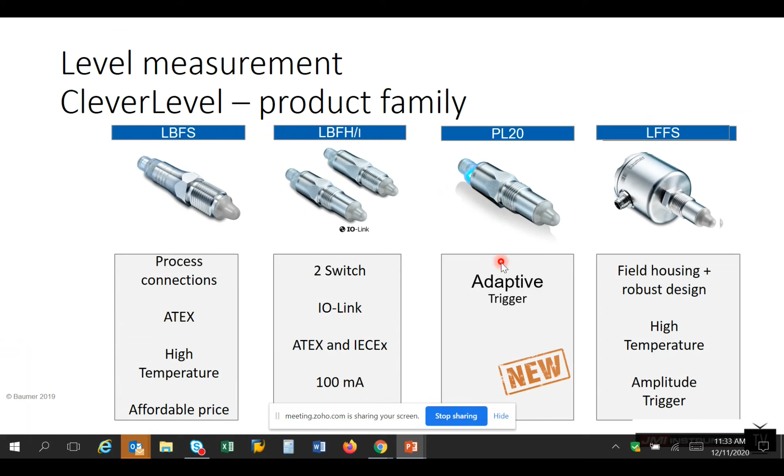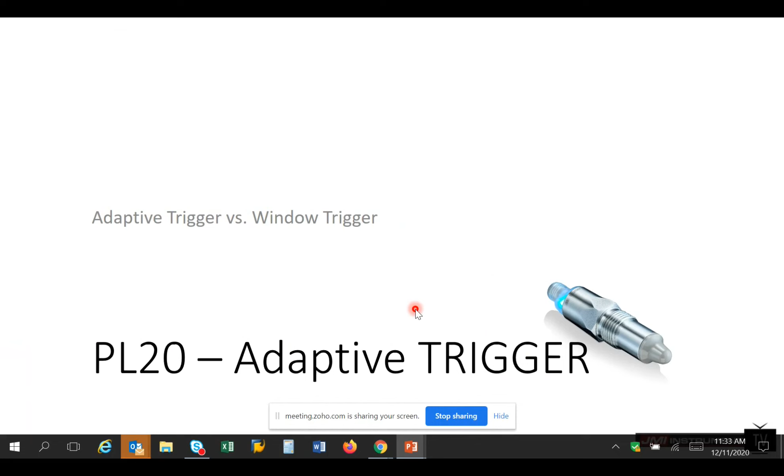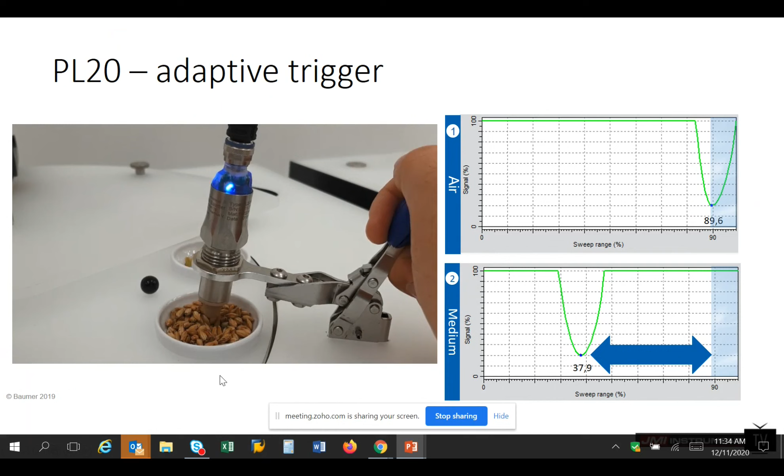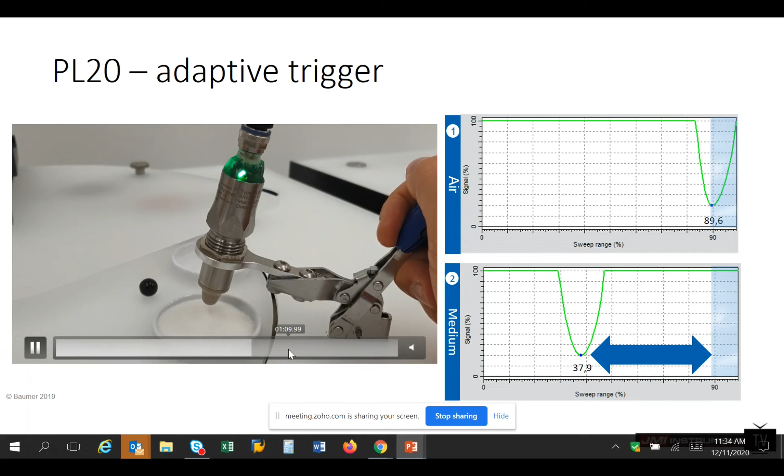So we're jumping through a little bit here, seeing different medias. This is rice of some form. Looks like maybe raw hops before it's been pelletized. Some granulars here. Again, we're going to see it switch from green to blue. Jump ahead to some liquids, some sticky medias.

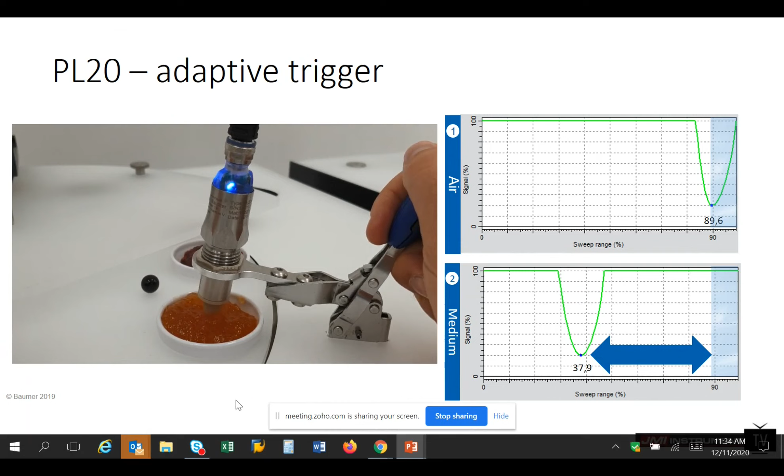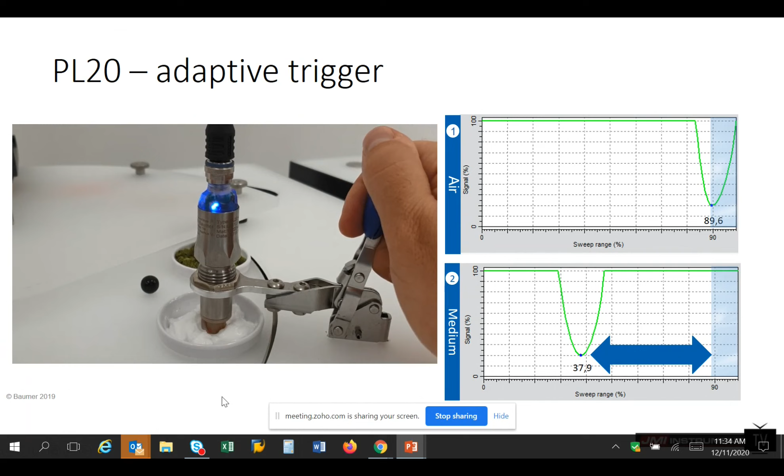So again, Kyle, this is all the same probe, and you can do it in all these different medias. I'm seeing liquid, different types of solids or jellies. Correct. And is that like sour cream right there? I believe it's hand cream, but yep, it's all just the factory settings, original, just right out of the box and hooked up. So we'll go over into the details of what makes this all work right now.

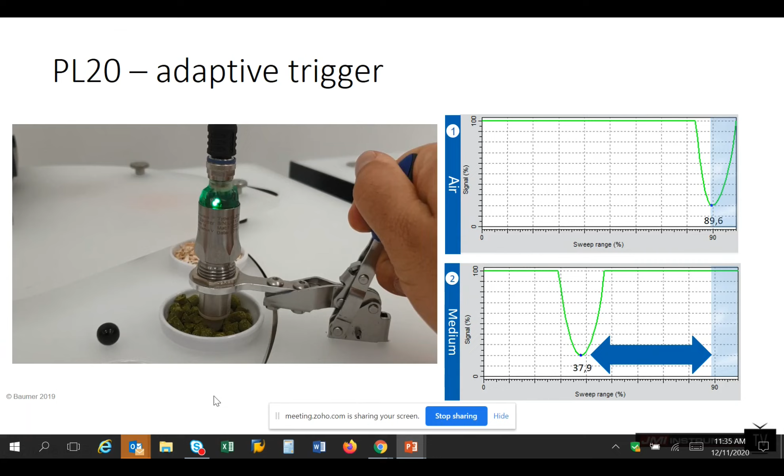So we keep saying adaptive trigger. What does it do? What does it offer to you as a customer? It's going to give you level detection without any configuration. Currently, when you put a tuning fork in, it will just turn on and off, no questions asked. If you looked at some of the other technologies similar to ours, you have to choose a media range ahead of time. Is it going to be dry? Is it going to be wet? Is it going to be bulk powders, or is it going to be liquids? With this unit, we can just take it out of the box, hook it up to a power source, and we're pretty much ready to roll.

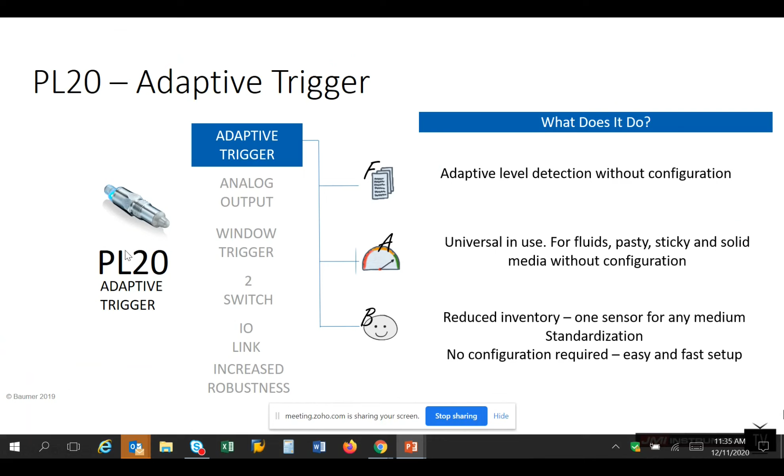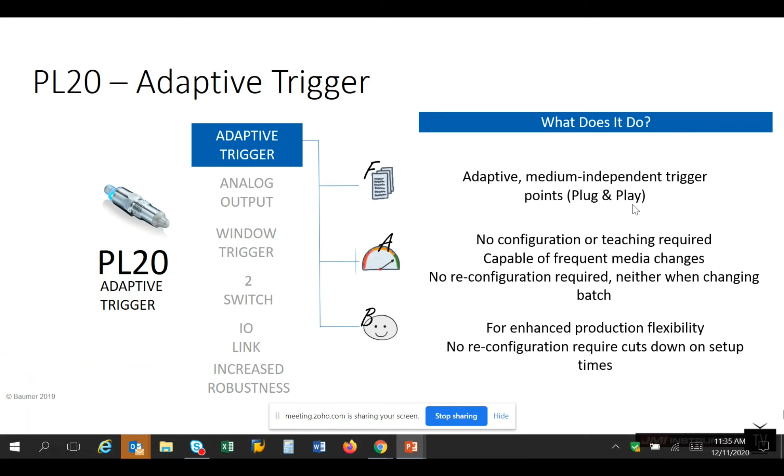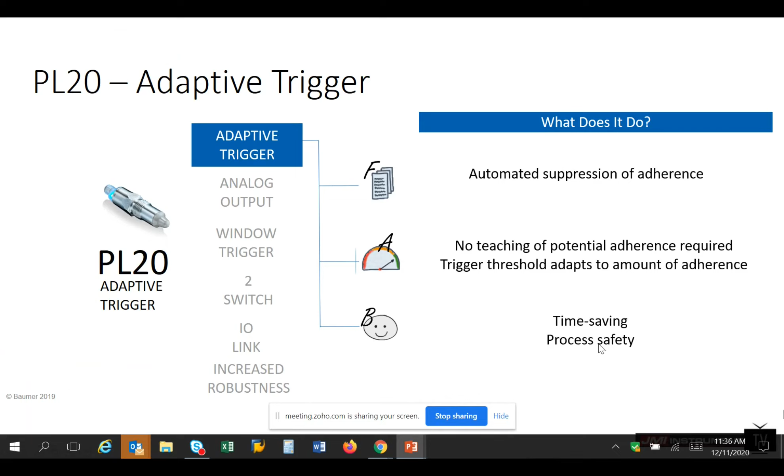Some of the other features, again, if we are changing through, there's no configuration needed. We can just go ahead and hook it up, and we're ready to roll. Lastly, if our product is going to build up on the tip of this probe, it's self-learning enough that it will tell that adherence, and it'll be able to work through that in its own fashion. So we don't have to worry about cleaning it as often. CIP will certainly clean it if it's in a pipe or in a tank. So it's just a time savings to get it up and running and get your process going.

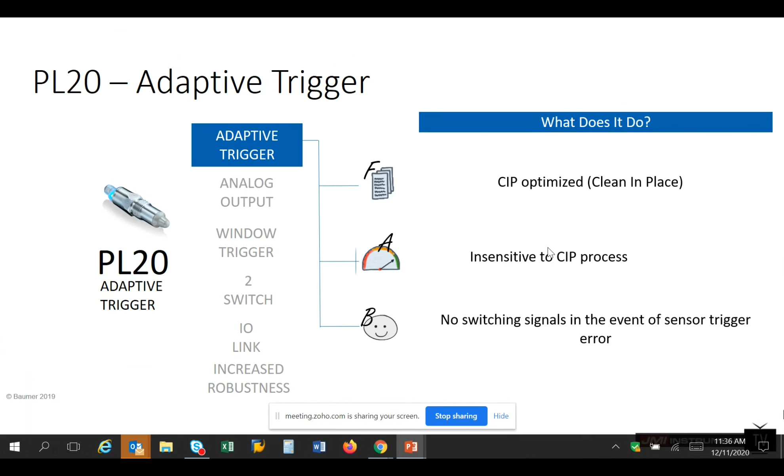Lastly, it'll tell you if it has buildup. Is that it? Yep, we can enable it to do that. What it will do is it'll work through the buildup as it happens in its natural state. So we don't even have to do anything with it. And then in the CIP process, if you have it for tank level, part of the problems with tuning forks and some of the others can be that splash on them or the cleaning spray ball will cause some issues to the other sensors. So we'll cover real quickly what we have that allows us to not have those issues.

So if you order a PL20 directly from the factory, or from JMI I should say, what you're going to get is a switch setup with the adaptive trigger. You're going to get dual switches. We're just looking at switch configuration 1 here, but it's a dual switch device, 24 volt DC, your choice of PNP, NPN, or digital push pull. Once you have it, you can configure it to normally open or normally closed.

If you wanted to. Factory direct, it comes normally open, disabled advanced settings. The set points, we went through as the factory and found that these are the most commonly used ways or setup for this switch. So again, it's very easy to just take it out of the box from JMI, get it hooked up, and you're off and running.

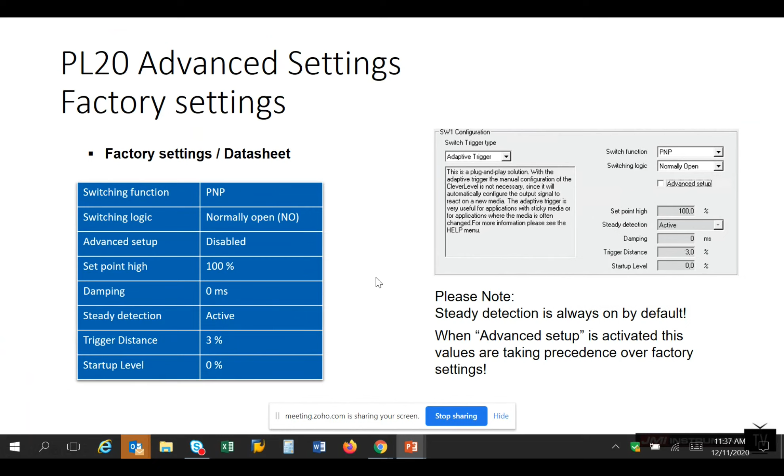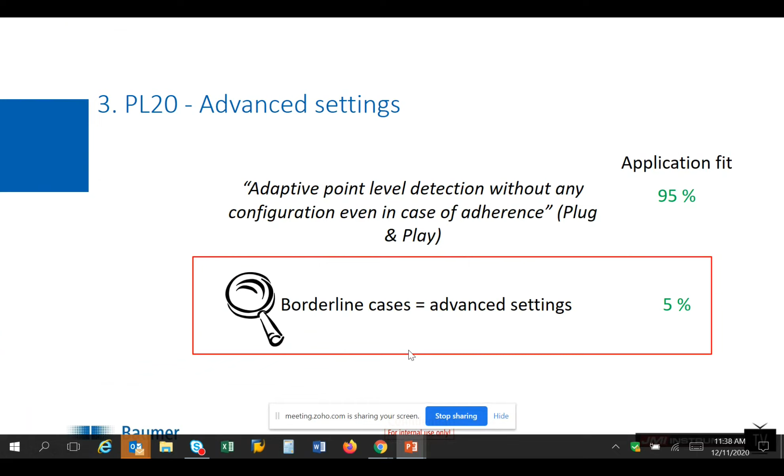If we are part of this 5% that is not going to be just a plug and play device, we do have options for some advanced settings. We're going to go over those now and kind of walk you through what they do and what they have to offer. Steady detection. This is one of the ones that separates us from, say, a tuning fork or the competitor's products, is this steady detection.

So when we are cleaning with a spray ball in a tank, we have the water coming out. It may run down the wall. It may spray directly on the switch. There's a lot of things that can happen. And the LBFH, our 3rd generation switch here, is similar to the competitors or a tuning fork, a little bit closer in the way it functions. So we're going to go ahead and watch this video and we'll see what happens with the LBFH here.

So this is the old Baumer CleverLevel, right? Correct. This is generation 3. Now, if we wanted to, we could go in and tune this and make it work in this situation. But right out of the box, it's going to trip for you and it's going to act like a tuning fork. So again, you can see we're having some issues there with it. We could tune those out, but as a whole, out of the box, it's going to not work right away.

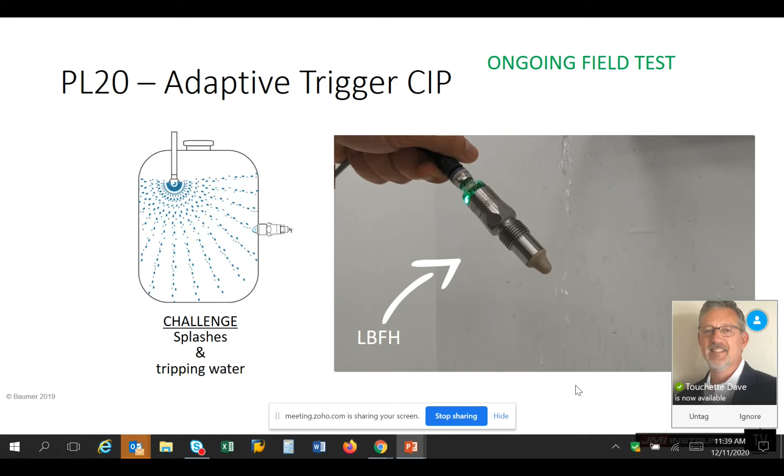With our new PL20. Wait, that's the last name. What was that? Dave Touchette. I didn't know if he was joining us or not, but he was available. Oh, anyways, sorry. I know you're fine.

So this is the new one, right? In a spray ball application, you don't want these to trip. Correct. Right? If you're not having any level in there. So it's just showing out of the factory, it's going to trip when you're in a liquid. So here we're seeing level actually, and then we're not going to.

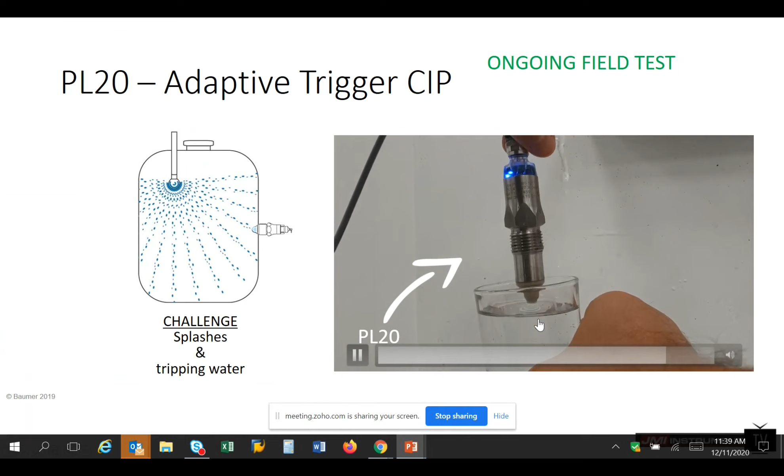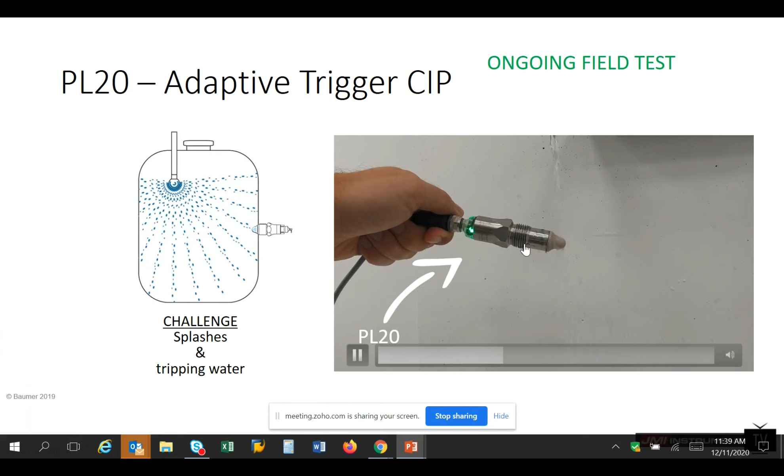So part of what makes this work is, you may have noticed in the original video, and I forgot to mention this, it took about a second before it switched from green to blue. And that's what we're looking for, is constant presence of a liquid at the tip right here in the peak before it'll switch. So it's about a second, and you'll see again here now, it's in there for a short time, and now we tripped. So that's how we get around those issues with the steady detection.

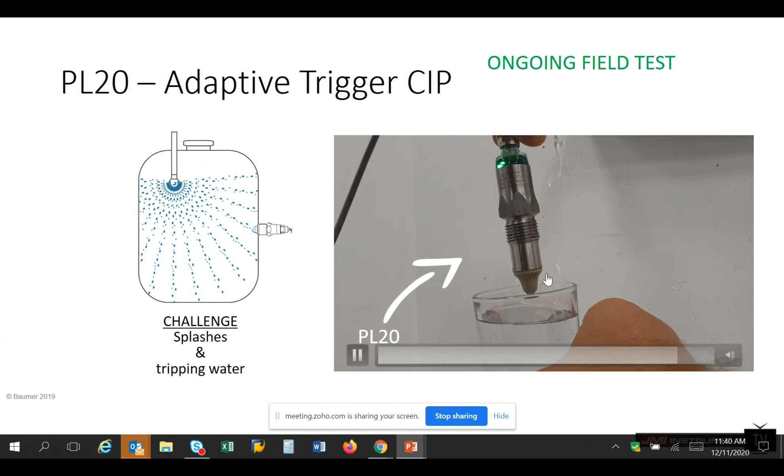That's built into the tip section, different than, say, a dampening function. Right. Yeah, you can adjust dampening no matter what. But okay, I gotcha.

Yep. So our trigger distance, what this is discussing is how far from air or the stable media it moves when it senses something. So in this case, it's looking at water. So if the switch were just held out in air like it has been in most of the demonstrations we showed today, it's seeing a rating of roughly 90.2%. When you insert it into water, it's seeing 15%. So you're seeing a distance of 75% that it's moving. So obviously a big shift.

What about something, though, that's a bulk solid that has quite a bit of air to it, something like coffee beans? If we wanted to use this switch in coffee beans, could we do that? So we take a look here, and we can see, again, air is going to be 90.2. And then when we have it inserted into the bulk coffee beans, we're seeing a measurement of about 81.7. So we're seeing a switch or a distance movement of 8.5%. And if we look at the factory settings, we're saying it's 3%.

So if we wanted to see this, it's obviously going to in its factory form, but maybe we wanted to avoid these bulk solids, we could change the trigger distance and look for only a finer powder or something like that that's going to be denser and give you more of a movement or a trigger distance.

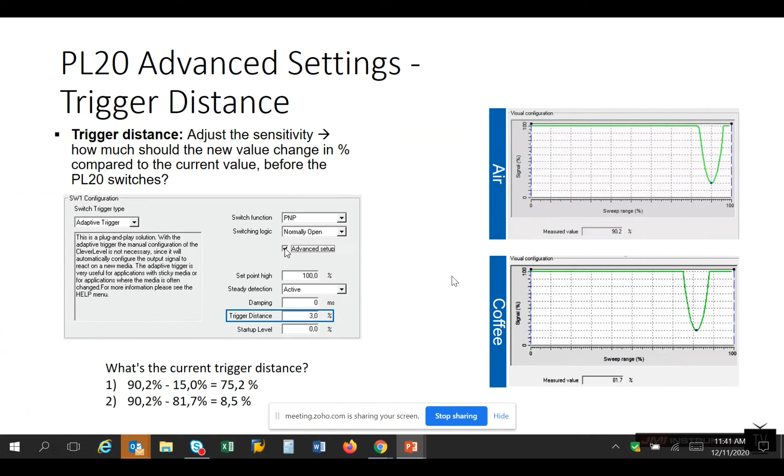So a set point high, what's that going to offer us? So right now we have it set to 100%. So we're going to see pretty much anything and everything. But perhaps we know we have a foamy product that we're going to have in the tank, and we're going to fill from the bottom, and this is a high level switch.

And we know what the foam looks like, and we want to make sure we avoid that foam, because in its current state, it will find the foam and trip on the foam, which is a very common setup with this switch. With the two switches, you can have one find the foam, and then the second one find the liquid behind it. That's one conversation we have quite a bit about tank level: everybody says, I want to find the foam level. Well, they don't necessarily want to find the foam level. They just know if they see the foam level, they know the liquid's right behind it. This switch will actually allow you to do both.

And one of the ways to avoid the foam is to change our set point high. So if we change it from, say, 100% to 80%, we know that the foam falls in at, let's just throw a number out there, 90%. This switch isn't going to activate at anything above 80%.

It also could be maybe we're mounted in a pipe where we're very tight to the walls, and it's giving us a reading that we're picking up the walls of the tank or the pipe here. We can again change that set point high so we ignore everything around it, and it's only going to look for anything below the 80% threshold.

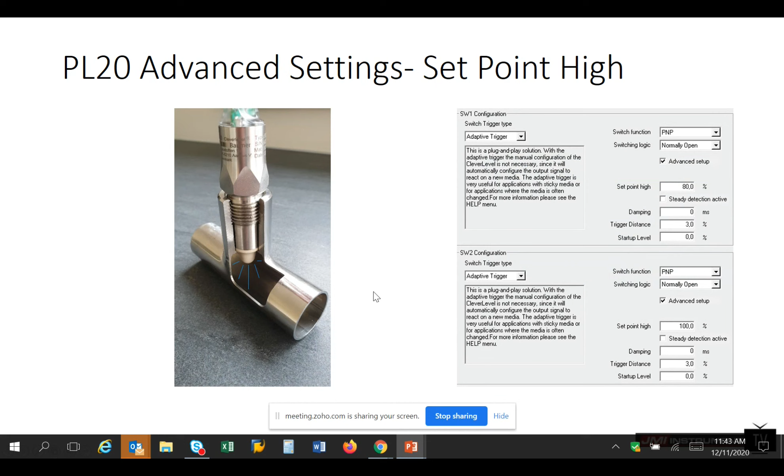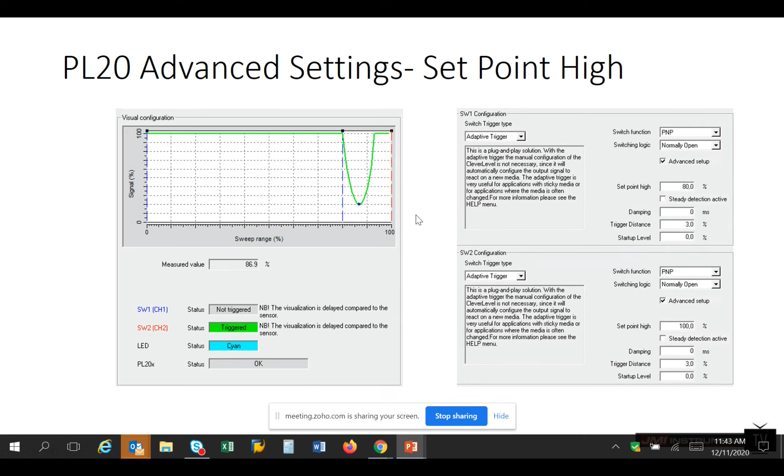So that's all in the adaptive trigger, right? This is the adaptive trigger, but these are the advanced setups. So if we put it in directly from the factory, like I said, everything we've looked at so far, there's been no issues that the factory settings couldn't take. Even if we went back to, say, the coffee beans here and the trigger distance, we're seeing that's an 8.5% movement, and the factory distance is 3%. So we're going to see that straight out of the box.

But if we wanted to fine tune it and say avoid these bulk beans here, we could use this to tune out the bulk beans and find the powder, or if it happened to be a mixture of ground coffee and bulk beans, we could use it for that. So these are all the 5% of applications that will not work with the factory settings.

Yeah. Okay. I just wanted to be clear to everybody that this works with just about any media, and this trigger distance, this hysteresis, you can adjust it to where it either reads or doesn't read just about anything. You're going through a lot, but I just want to highlight, it's pretty cool. If you are doing beer, it can tell you that it's beer liquid, and then here's when foam is being triggered, here's when foam's not being triggered, and you can set all those sensitivities however you need, as accurate as you need to be.

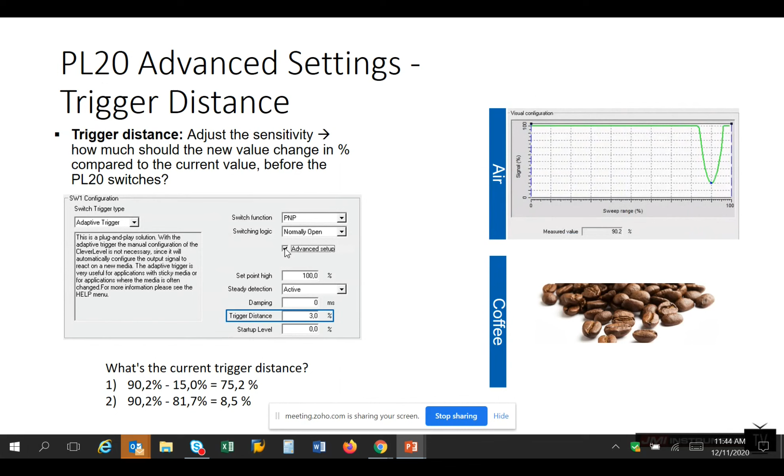So I just want to highlight how versatile you can program these, and of course, JMI and Baumer, we're happy to help you program them. That's what you're talking about, but yeah, you can use them. And I've got a demonstration here afterwards where we'll go through some of the quick setup that's available.

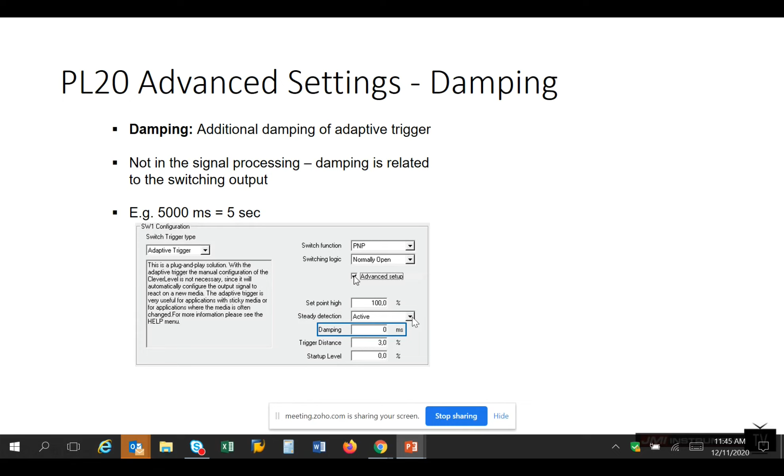Okay. All right, I think we were right there. Dampening. Now I mentioned dampening earlier, and the steady detection. You can see here the steady detection is set as active, and that actually takes place right in the measuring tip. So this dampening after the fact would be if we're in a filling process, or when the media is moving or sloshing around. It could be in a tote or something like that, or we have a mixer that, as it's draining, might splash it up further on the sides.

We can really build in a dampening effect of whatever we want. So you could use it in combination with the steady detection active, or if you want to turn this off and build in your own dampening, and you know that 5 seconds after it starts to see something, you want it to trip a trigger, you can do that. Again, just another added bonus that really fine tunes it to your process and what you're doing there.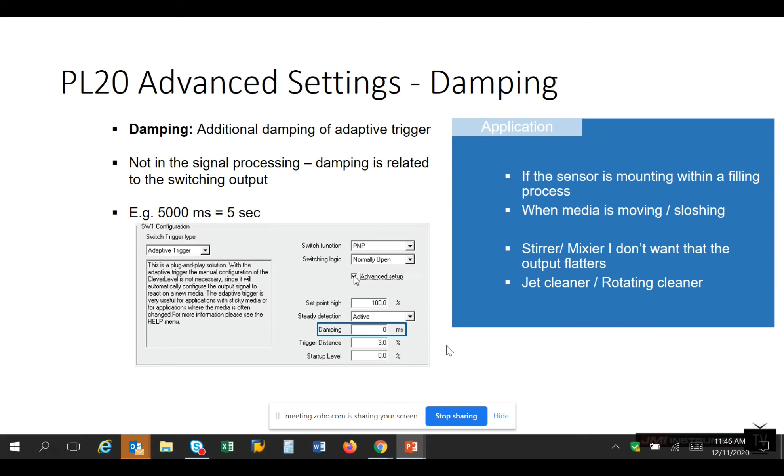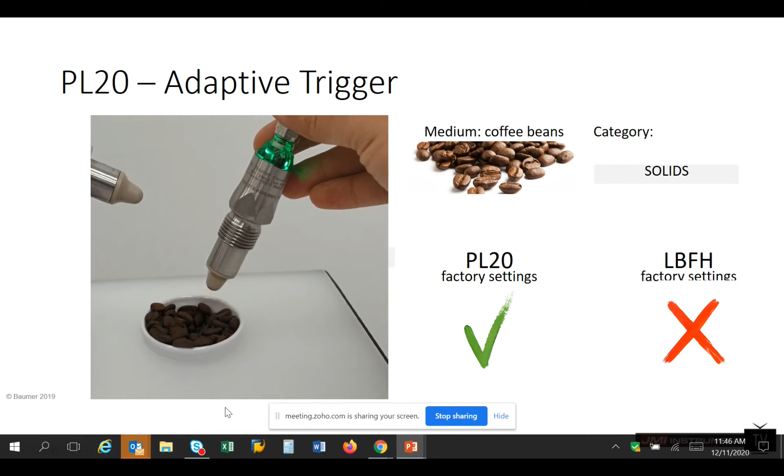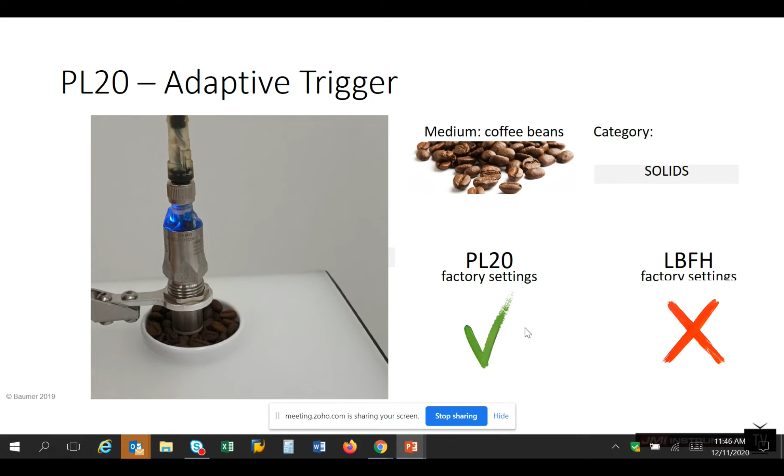So like we talked about, here's the factory settings again. This is going to be comparing our new adaptive trigger, the PL20, with a factory LBFH, our third generation versus fourth generation. Again, there are instances where that's what a lot of the competitors are using. The competition would be the same as our older technology with the LBFH. So the LBFH would represent kind of like a tuning fork or anything else.

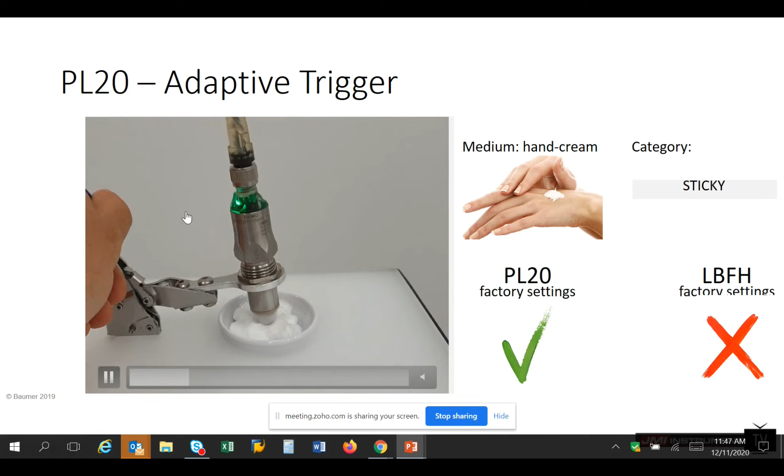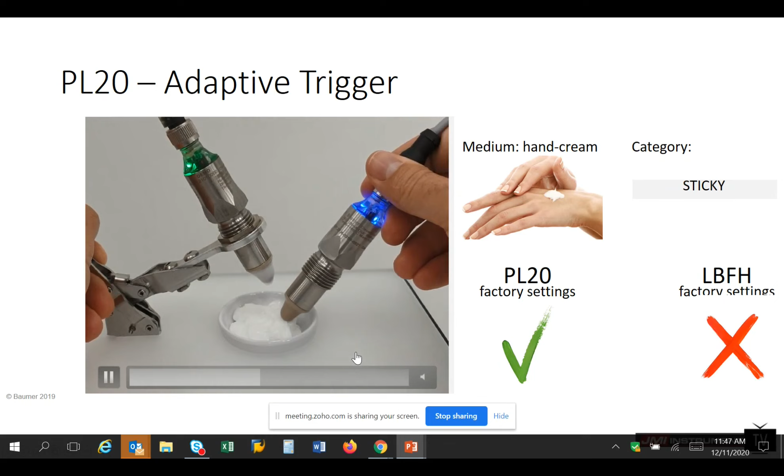And here we're going to look at a hand cream with the buildup. So you'll see the unit switches. And again, we have that delay in there for the steady detection. And it goes back to the normal state. Trips. We pull it out, and you can see the buildup here of the hand lotion or the hand cream on there. And again, the competitors' products, they're going to come in, and the buildup there is going to keep it tripped. So we're not getting the results we're looking for.

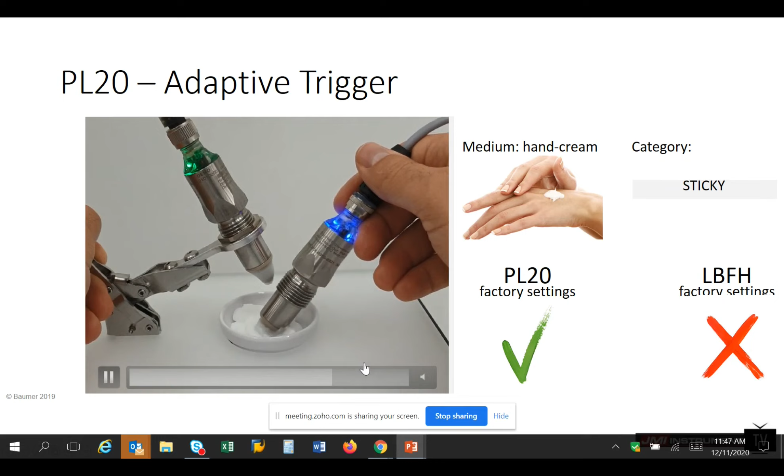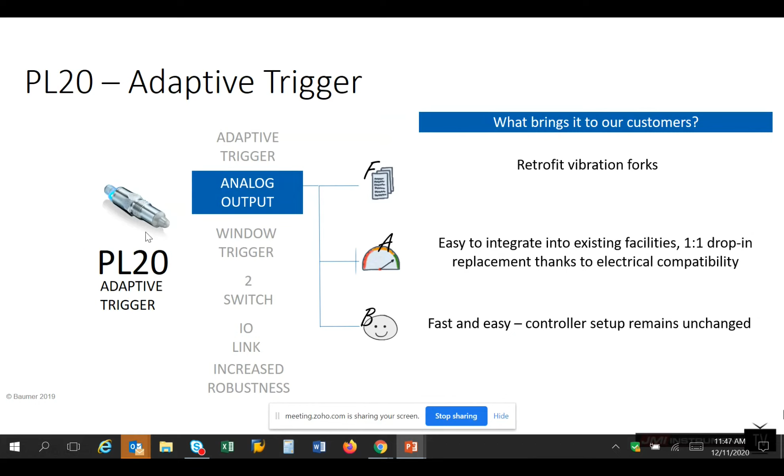And then the last kind of cool feature we have built into the PL20 with adaptive trigger is an analog output. How many times have we wanted to see what was going on in the pipe and not just get a switch, but know what's going on? Do I have product in here that I don't want in here? Is it the correct product? How far along in the process am I? If I could add something in there that could give me a switch and an output, man, that'd be great. Well, now we have it.

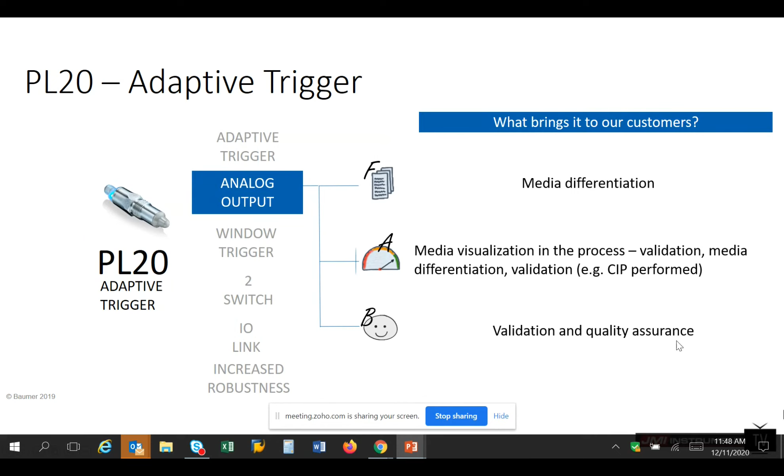It's going to give us some media differentiation. It's going to validate what we have in the tank. Is it matching what it should be matching? The other big one is, as we showed there with the hand cream, we can get buildup on the tip of a sensor, and we'll still get a switch from the PL20, but maybe I want to know how thick that is. Is it building up too quick? Maybe that's something that's wrong with my process. If I'm getting too much buildup on the tip of the sensor, I know I have a problem. So again, just an option to really look inside the pipe or the tank and see what's going on.

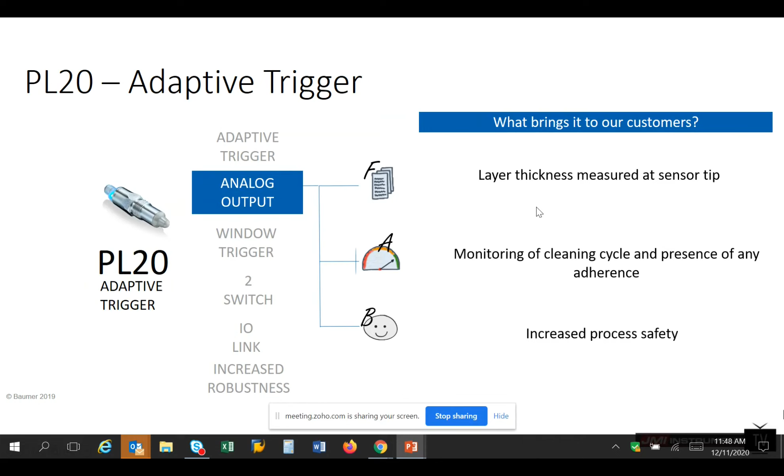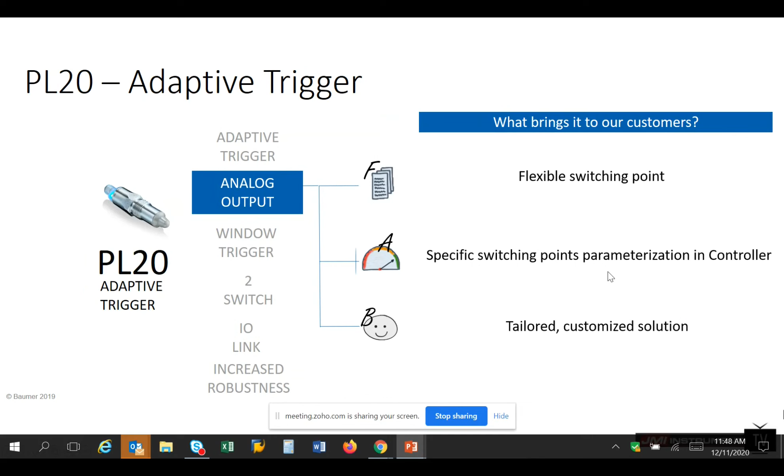Also, then you could build in multiple switch points. Maybe you want 3 or 4 different things to happen in the tank. We have 2 switches available in the PL20, but then you want another additional 2 switch points. If you use this analog output, you can put in as many as you want through the PLC and use that analog data to switch things as they happen. This is just showing the wiring and the zoom function of it here, and I'll kind of get into that in my demonstration a little bit.

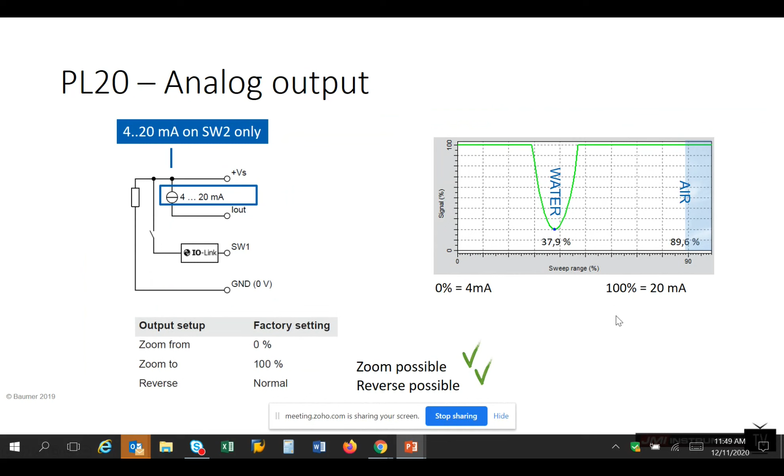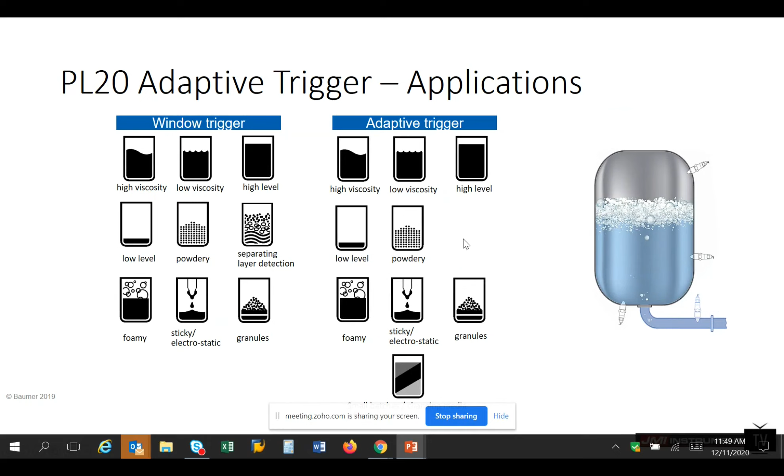So where are we going to use the adaptive trigger versus the window trigger, which would be the standard product from another customer? Where we're going to see a lot of these different things, and we don't want to take the time to set it up. So I want to just pop it into a tank for something that's viscous, low level. When it shows being able to do all these over here with a powdery substance or granules, it's taking into account that you have to pick the right switch to begin with. Same thing with the tuning fork. Did I pick a solids tuning fork ahead of time, or did I pick a liquids tuning fork? Did I pick one that's an NPN or a PNP ahead of time? Those are all things with the competition you have to pick ahead of time. With ours, you can switch in that program between a PNP, NPN, digital push-pull, or the 4 to 20 milliamp output.

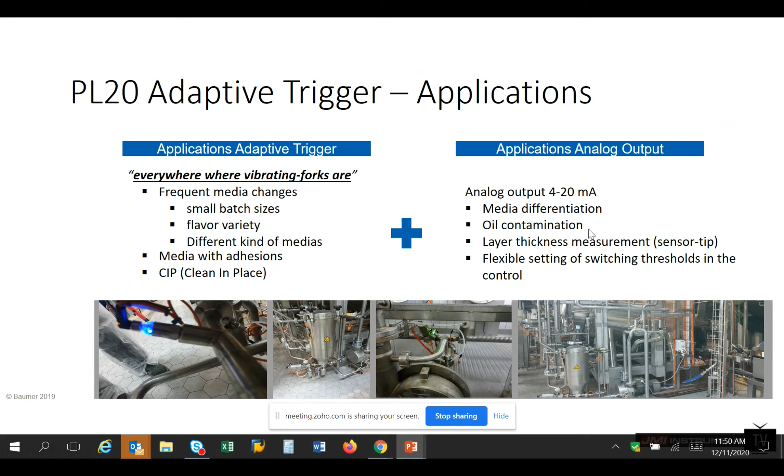So small batch sizes, things that come and go pretty quick. We don't want to change the sensor every time. If we're pumping in different flavors of things, maybe we're putting fruit into yogurt. Again, maybe there's contamination going on in the process, and we want to be able to see as that happens.

And then lastly here real quick, the process connections. You can see there's not too many offered. You're getting a G half-inch, a G half-inch hygienic and NPT. But what we do with our hygienic version, or with all these versions, is we offer adapters. So if you wanted this in a 2-inch tri-clamp, we have an adapter.

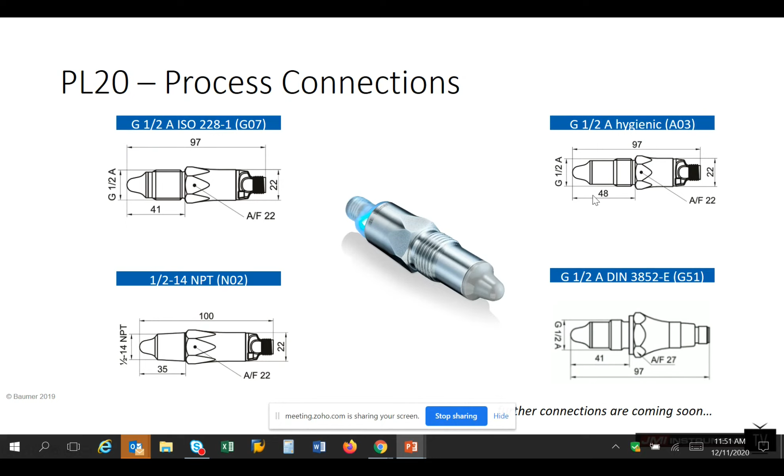If you needed an SMS nut or a Varivent, or you wanted to go to a G1 or a 1-inch NPT, we have adapters for all those as well. So again, we try to cut down on the number of SKUs to make your life easy. You could stock this G half-inch on your shelf, and JMI could have a couple for you as backup, and then you can order it and just swap it out with adapters and all those kinds of things. You're going to be ready to roll.

I imagine you'd save money that way. You'd buy less tri-clamps. Correct. Yes, you don't have to buy a tri-clamp every time. If you had to replace the instrument for some reason, you wouldn't have to buy another tri-clamp, like you would with, say, a tuning fork. It only comes with a tri-clamp, which adds quite a bit of cost to those. Yeah. Okay. Well, thank you very much.

Go ahead. Sorry. Yep, I think we've hit about 20 minutes if I had to guess. My timer started late. Did you want to do the demo quick, or do you want to do some Q&A? So I received word that there are a couple of people, some customers attending this webinar, that have appointments with you afterwards. So I'm going to open it up for a general Q&A. We do have a demo planned, but if anybody has any questions, we'd be happy to hear from you in the Q&A.

And I'm sorry to the Q&A, but Kyle says he doesn't sing. It's unfortunate. I wanted to hear it too, frankly. So, does anybody have any questions? I think they're all still connecting with the mic. There we go.

Well, while we're waiting, I'll get started on the demo here. Yeah, I'm getting a notice that they want to talk to you afterwards about an application. So go ahead, start with the demo, and then right around noon we'll be wrapping up, and we'll get you on to the next people. So thanks. Yep, thank you for having me.

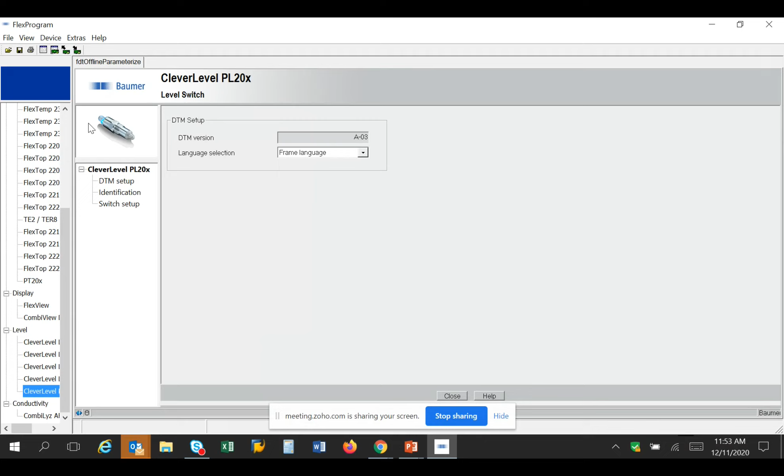So hopefully it's showing the right screen here. What we're showing here is going into the programming with the FlexProgram, which is a device that allows you to talk to about 95% of the Baumer products. It's going to allow you to go in here, and I can add a tag. If I read from the device here quickly, it's going to give me the serial number, when it was manufactured, and all those good things.

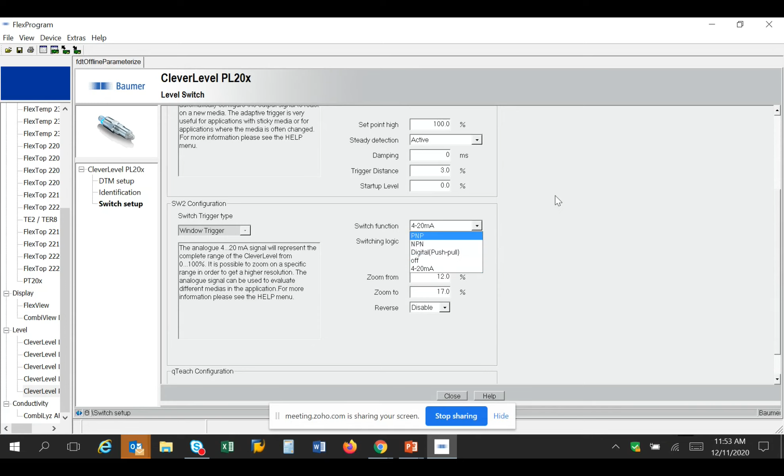And then it's going to show me the stock setup, the way it's been ordered. This one was ordered with the 4 to 20 milliamp in it right away, so it came set up that way. This is configurable. I can change this to whatever I want and switch it off of there. But we're going to leave it as a 4 to 20 milliamp right now, and then the PNP. So we can go live with this unit and see things as they happen.

So it's kind of hard to see, but let me tip my camera down here and see if you can see. I have little bowls here. I've got milk, water, and a barley type beverage. We can see that. Okay. I need to kind of see both, but let's see if I can make it work here.

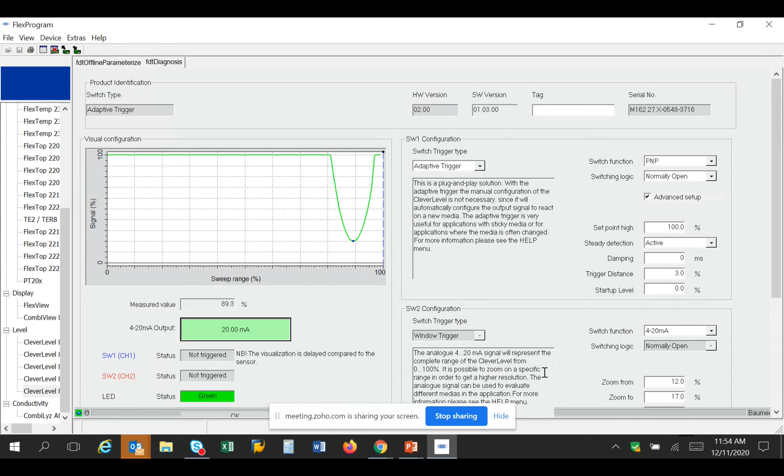So I'm going to put it into the water. You can see it move. Okay, and I see the LED green. So is that the? Yep. So the green means it's not triggered, and then we put it in there. Okay, I see the 4 to 20 changed from 20 to like 15. Correct. Okay. So you can program that into your PLC as a switch, right?

Correct. Yep. So then we're in the beer here, and you can see it move there a little bit. You can see that the percentages are very close, though, and the 4 to 20 milliamp signal isn't really moving as much as maybe we wanted. And now we're in the milk. So you can see it's really kind of hard to read what's what directly.

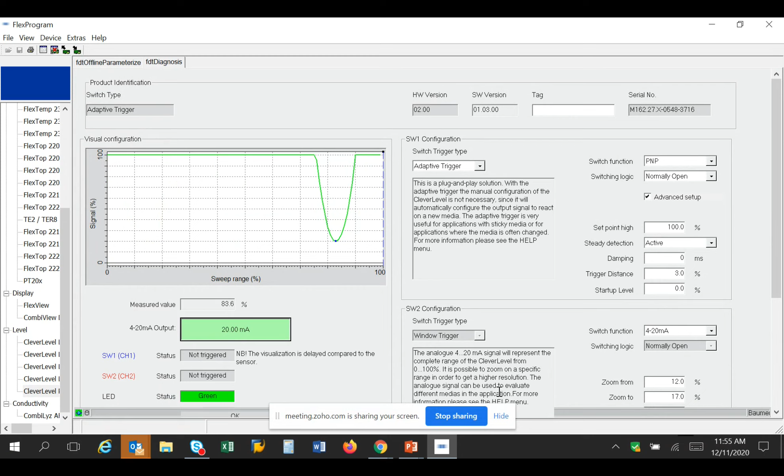Now, so I can see my monitor here. Oh, I had it zoomed in already. That's why we're seeing so much. Let's try that again. So we move these back to the factory settings of 0 to 100. So when we place it in here, we see a movement around 18 milliamps. When I go into the beer, it's very similar.

And then into the milk. But when I used it the first time, you saw a greater variation. I had it zoomed in already. So you did it right the first time. Yeah. So if I go ahead and zoom back in, because I saw that all mine were between 12 and 17, now when I do it, I get much more movement in my 4 to 20 milliamp, and I'm much more accurate with my readings, and I can tell the difference between the different products.

Yeah, and the resolution on that is pretty incredible. We're zoomed in at, what is that? That's a 5% window, and we're reading different 4-20s within that 5% window. Is that right? Correct. So, like I said, I have it in the milk right now, so we can see milk shows 4.6 milliamps.

And then if you were to start seeing contamination even, so now I put it in water with a little bit of the milk, you can see it's changed the reading of the water originally. So again, a very unique feature that isn't available with anything else. Now it's in the beer, and we can see, again, we're getting quite a bit of difference between the different ones. So you can do switches, or you can do this 4-20 output, and you can zoom in and even detect minor changes if you want to.

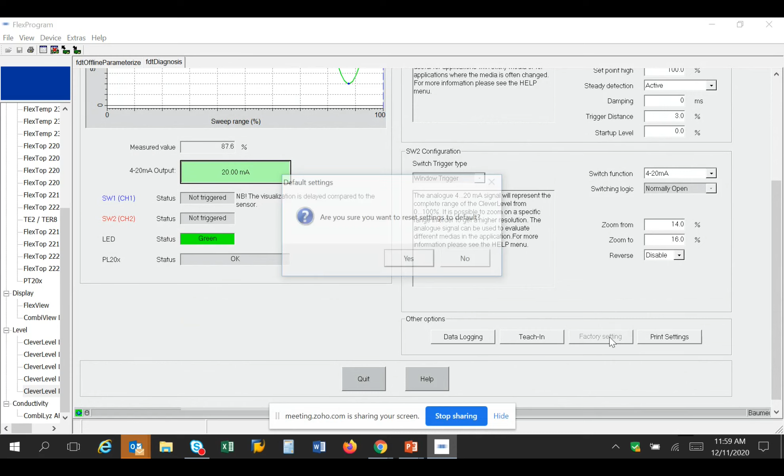Here's one thing that I do all the time because I like to play with my switches. If I ever get it out of whack and it's just not responding, I don't know how to fix it. You simply do that, and you're back to the beginning, and you can start all over again.

Cool. Well, this is great. Well, Kyle, thanks so much, and I'm really glad we did this remotely, because if anybody has any questions on those settings, some customers might think this is really cool, but I'm used to using a vibrating fork, and I don't know how to do any of that. The great thing is we've got Kyle. And I know how to do some of those things, but I can always video in Kyle, and we can show his computer, and we can set it up however you want, virtual service, however you want to do that. We can figure that out for you.